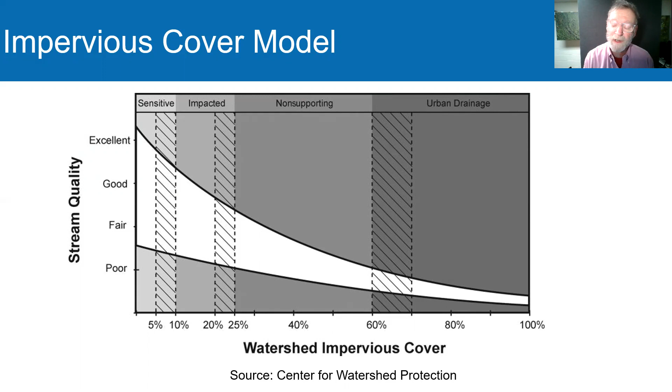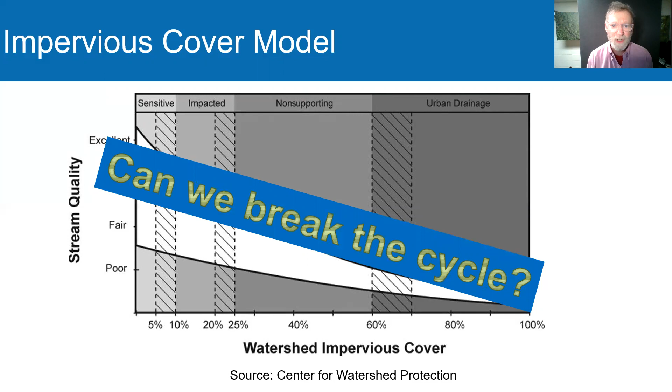And stream quality could be physical things such as the degree of erosion, could be biological things such as the macroinvertebrate community or fish community, and it could be chemical things such as water quality. But one of the things that's clear from many studies is that as watershed impervious cover increases, stream quality or stream health decreases. So the question is, in a developing or developed watershed, is it possible to break the cycle using stormwater practices or stream restoration or other types of restoration practices? And that's exactly what Kip and I are going to talk about today.

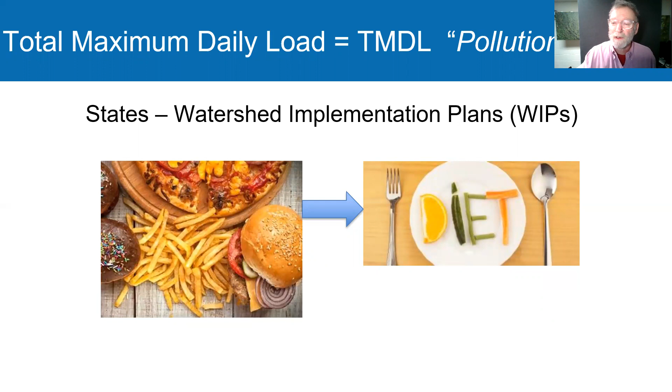One of the things that we have going for us in the Chesapeake Bay watershed is this total maximum daily load, or more colloquially known as the pollution diet. And you can kind of see the diet there in terms that we all understand in terms of food. The watershed implementation plans, or WIPs, are what each state in the Chesapeake Bay watershed uses to define the practices to achieve this pollution diet.

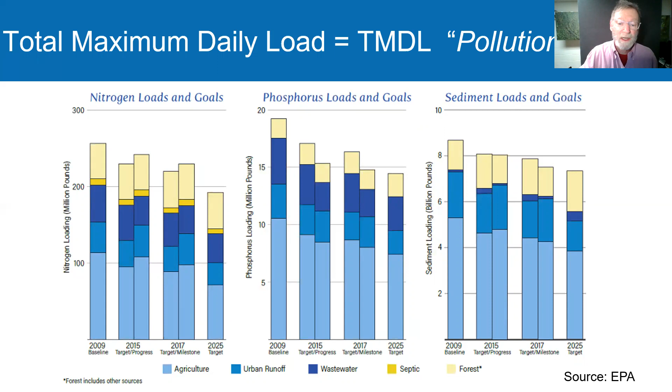We are under the gun here in the Chesapeake Bay watershed. The baseline year for our water quality metrics, which are nitrogen, phosphorus, and sediment, is 2009, and we have a goal in the TMDL to meet our targets by the year 2025. So we have some ambitious reduction goals, which translate to many practices across the landscape and including in the stream corridors.

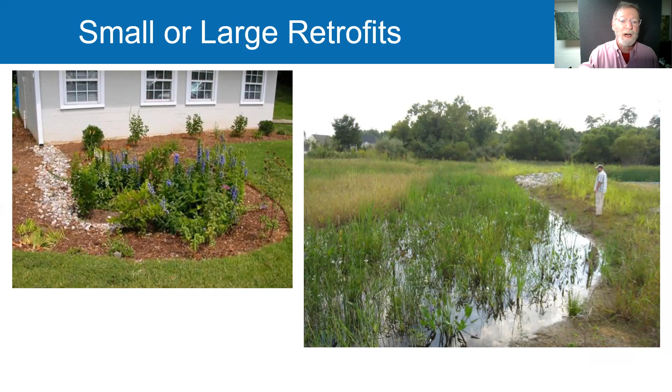Now, one of the things that we have to do in order to meet this goal is to do retrofits. And retrofits are either going to a stormwater practice that was built in the old days. It's there, maybe an old detention pond, probably not doing a lot with regard to water quality or even habitat, but it can be changed. It can be modified and improved to perform better across all those functions. So the retrofits can be small, as you can see here on the left, individual residential types of rain garden things, or they can be bigger, such as this stormwater detention retrofit. And we're going to talk about things that operate at different scales.

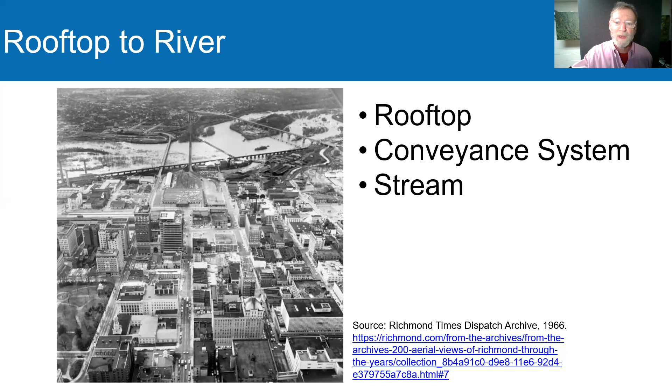So the latter part of this presentation is breaking this down a little bit. I'm going to talk about the rooftop and the conveyance system, and then I'm going to turn it over to Kip to talk about the river corridor itself, and then bringing home some lessons from all these implementation experiences that we've had here in the Chesapeake Bay. So let's start at the rooftop. Of course, this is the smallest little packet of water that we can intercept and treat and hopefully improve the water quality as well as the quantity of runoff generated.

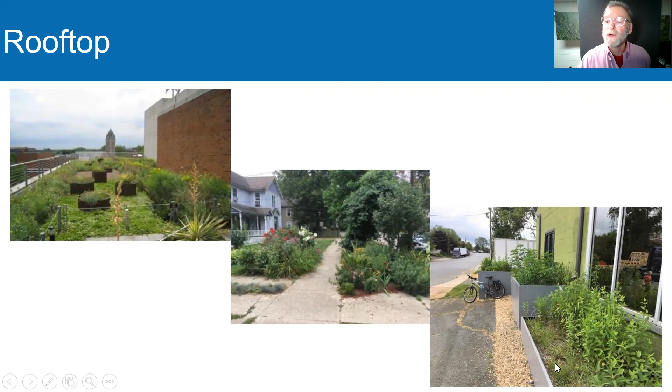Obviously, we have things that reduce the runoff right at the source, like a vegetated roof. We can use even simple landscaping or conservation landscaping practices to intercept the runoff from small drainage areas like rooftops and driveways. And we can even do things like these stormwater planters, which take the runoff directly from the rooftop.

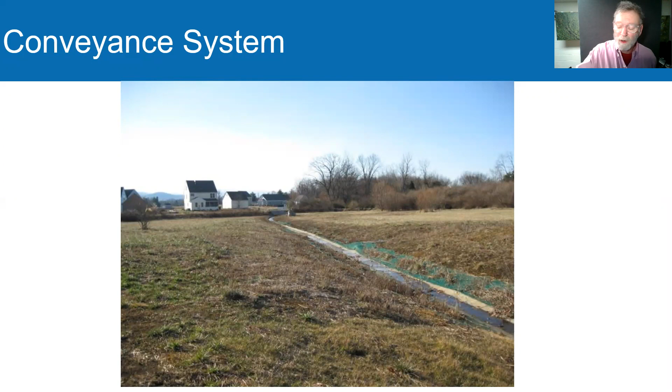So what can we do with old infrastructure like this to enhance its function for water quality as well as other functions? And so in this case, we took that water, we lengthened the flow path, and we added a lot of wetland vegetation. So we slowed the water down, created a lot more storage, especially for those smaller storms or more routine storms, and added some habitat features by converting it to a wetland. So that's an example of retrofitting along the conveyance system.

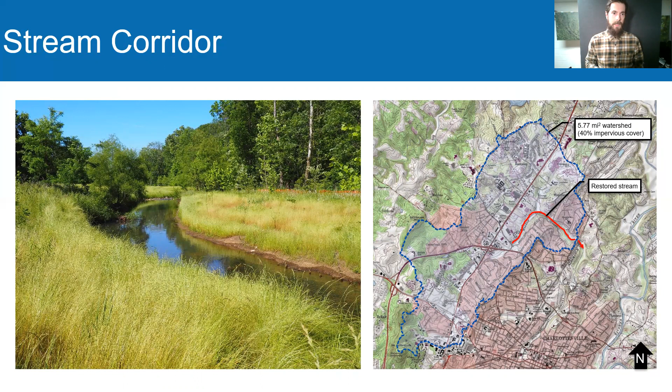In the photo to the left, you see again that demonstrating what can be done in the stream corridor, such as floodplain connectivity. And so these are the opportunities that we have in the stream corridor versus what we have upstream in the landscape, in the watershed. We have the opportunity to slow the water down, again, similar to practices upstream.

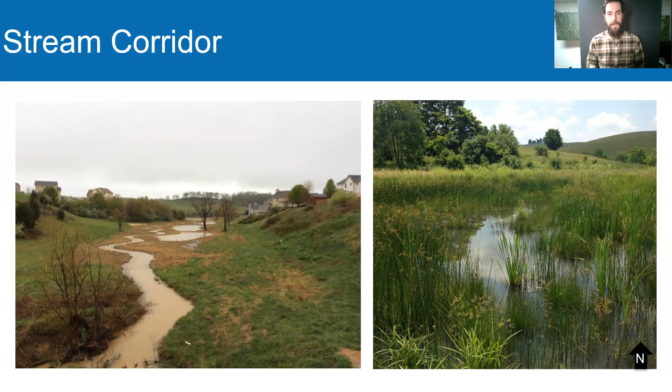We have the possibility to take some of that flood flow, those storm events, and get them onto a floodplain where we can see denitrification, other pollutant removal, deposition and sediment storage that can occur there. The picture to the right shows 3 years post restoration and a wetland that has developed in this lowland area where flood flow is distributed to.

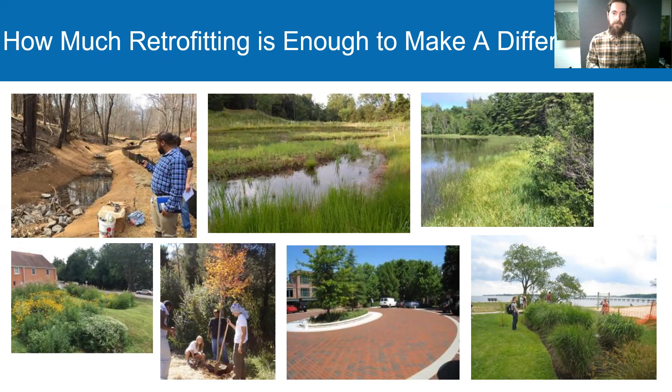So the million-dollar question is, how much retrofitting is enough to make a difference? And as most scientists and practitioners like to say, it depends. Each watershed is different and has different characteristics, geological characteristics, as well as different impacts to water quality itself. And so as we look at each watershed, at the specific impairments downstream and the specific opportunities we might have, an individual watershed management plan has to be crafted to identify what practices are going to take place, and then appropriate monitoring thereafter to ensure that the practices are actually effective.

And that's what's been done. Numerous studies have been conducted to look at the effectiveness of upstream retrofitting and stream corridor restoration. And there are several success stories, and there are also several situations where the restoration or the level of retrofitting in a watershed wasn't enough. But it is at least a proof of concept that it can be done, and we can reduce the impact of impervious cover and the downstream impairments for sediment, nitrogen, phosphorus, and other pollutants that we might see in our watershed.

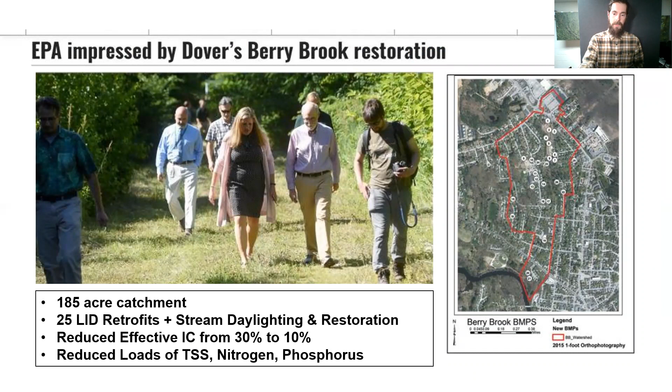So with that, a few of the take-homes that we'd like to leave you with: essentially, urban watersheds do change the hydrologic regime, so we see increased peaks at higher frequencies and lowered base flows, and that effect can't fully be addressed at the watershed scale, at the rooftop side of things. And conversely, the polluted runoff that the stream corridor is receiving cannot be wholly treated within the stream corridor.

So what we see there is we really need a watershed approach. We need both stream corridor restoration and the upstream watershed retrofits. And as we just went over, the how much is enough question is maybe unanswerable in a macro view, but on each individual watershed scale, we can start to approach an understanding of what might leave our rivers in good health through connecting green infrastructure together with restoration plans downstream.

And looking at some of these co-benefits and actions that we need to take on in the landscape and within the watershed, such as floodplain planning, looking at what sort of impacts climate change and changing weather patterns might have on our management of stormwater and our rivers.